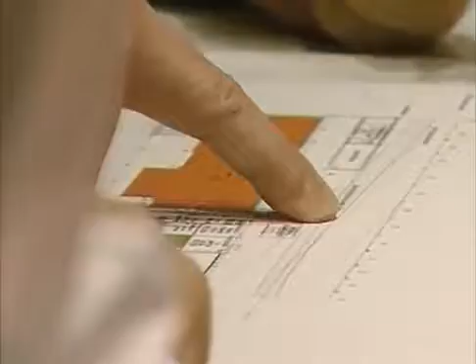Well, we had a very open brief. The club hadn't really attempted anything like this before, so they weren't dictating any particular method of working or role or brief for us. We formed a steering group with about 7 or 8 of the key people, consultants and clients involved with the job from pretty much the outset in March, April of 2000. We managed that group, and that really was the springboard for how the project started.

A major issue for the board of directors was to gain acceptance from the fans for a move from a much-loved home. This would be greatly helped by keeping Arsenal in North London.

Not an easy task, finding enough land to host the footprint of a massive new stadium and the associated increase in traffic to and fro. Amazingly, the Arsenal directors managed to find a site only a few hundred yards from Highbury, but it was far from deserted.

We very quickly realised that the project was broken into 3 fundamental parts: a new stadium, a relocation site at Lough Road where we would have to provide a lot of the facilities that were on the Ashburton Grove site, and then the final phase was Highbury Square.

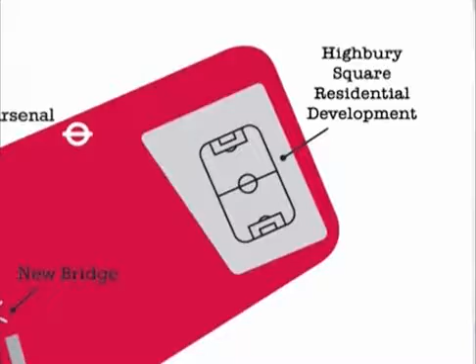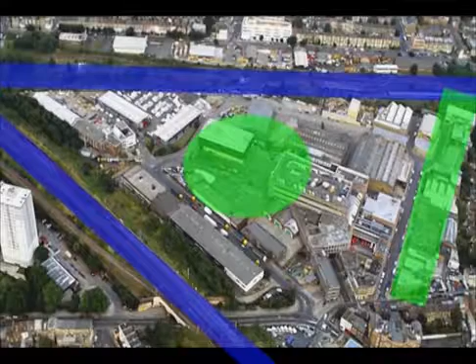Ashburton Grove is roughly a triangle. To the west and the east are mainline railway lines, and to the south a small industrial estate. In the centre lay a council-owned recycling unit, and this would need to be resited at cost to the club, as would the acquiring of the industrial units.

The rest of the project included the very substantial relocations of the North London Waste Authority's waste transfer station, the council's depot, their building maintenance department, and then there were a myriad of other occupiers on the site who all had to be relocated and their site purchased, or just a straight site purchase. That actually became the major focus of the first 3 years of the project.

The entirety of the site included land beyond the boundaries of the railway lines and beyond the Southern Road. Whilst this extra land could all be used, the stadium footprint would have to be within those boundaries.

A key decision was taken to appoint a builder during the design process, not always the case in such projects, and a decision which in retrospect was fundamental to the outstanding success of the project.

Well, we had a very interesting shortlisting. We started with about 6 companies who we thought might be capable of building the new stadium. Really at interview, 2 or 3 of those companies didn't really fit the bill. And then McAlpine were the most memorable, really.

At interview, Rolf Christensen very much came across as somebody who wasn't in any way or shape concerned about the magnitude of the project, wasn't overwhelmed by the project, and was very confident, and even relished the deadline nature of building stadiums and having them open for the beginning of football seasons.

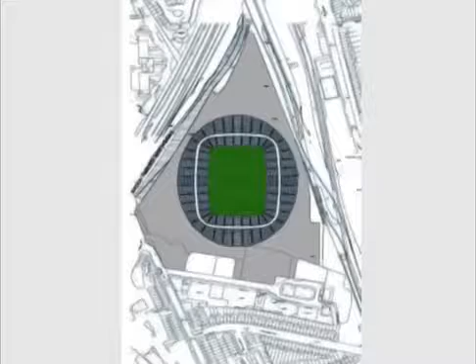An obvious but crucial design decision was choosing the distinctive shape of the stadium. A more conventional rectangular design was discounted, as it was too wasteful of much needed land, and in the end it came down to simple geometry, in that the elliptical shape fitted snugly into the triangular nature of the site, squeezing every inch from the available space.

And we were all new to it, so we all sat down and discussed every part of it, what was required, and they had traveled around stadiums all over Europe, perhaps the world, and they had an idea what they wanted.

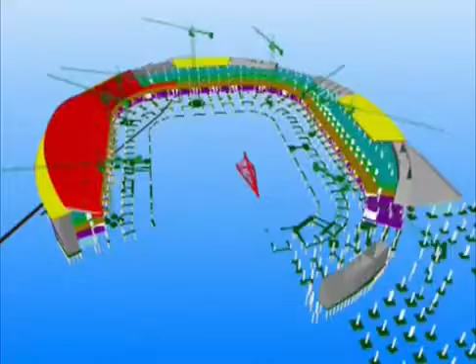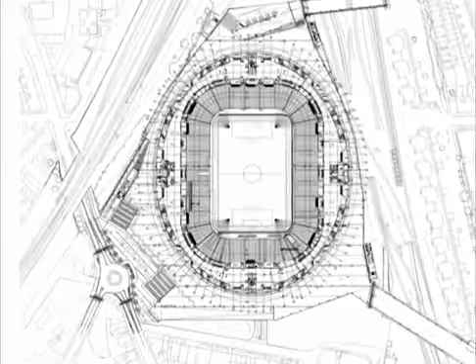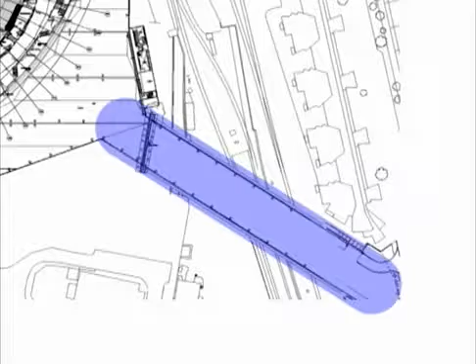To gain planning consent, the club needed to demonstrate that 60,000 fans could come and go with as little negative impact to the local community as possible, preferably using public transport. Two massive bridges were designed on the east of the site spanning the railway line, taking fans to both underground and above-ground stations. Another obstacle was the recycling unit at the site's very centre.

This would have to remain in operation through the early part of the build, while a new unit in Lough Road was constructed. Positives to the community were needed, and it was determined that the stadium would generate much more than simply a new football ground. Areas within the site would contain affordable housing and give companies on the industrial estate a chance of resettling into new premises.

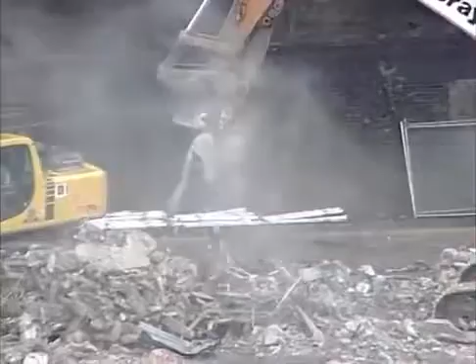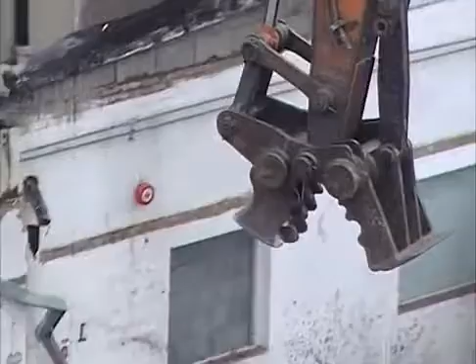What was known at this stage as simply Ashburton Grove would be a much needed and major regeneration of the area. With designs finalised and consents gained, some 2,500 signed documents later saw demolition teams move into Ashburton Grove in February 2003, and McAlpine's site teams settling into their new offices. Again, having designers, engineers and management on site was an important ingredient in the project's success.

Just as things were starting to happen, it all ground to a halt. It was about the end of March 2003. We'd been through the toughest year on the project, going through all the contract negotiations with McAlpine and the funding with the banks. We finally had virtually every one of our ducks in a row.

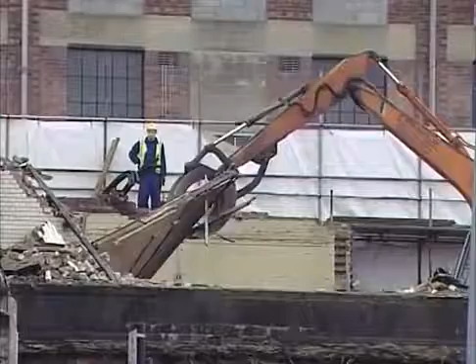Both myself and the client separately went off on holiday at the end of March. When I got back a week or so later, I went in to see him, and he gently dropped the bombshell that one of the banks had pulled out and that the funding wasn't now possible for the stadium.

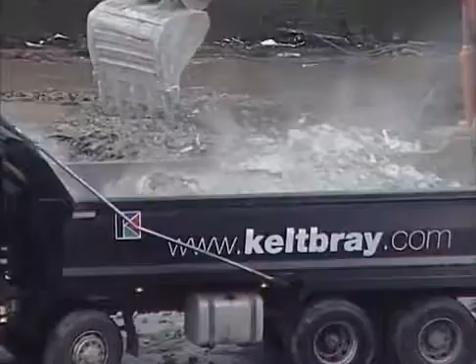Work stopped and the site was mothballed, though Sir Robert McAlpine used this pause in construction to continue design development and progress the Lough Road Waste and Recycling Centre.

Today is an historic day in the life of Arsenal Football Club. I'm delighted to announce that the funding has been secured for our new stadium project.

By the time the funding came in, that was 4 years on the project, and I think everyone had put so much into it that the thought of it not proceeding was awful. So there were some pretty major celebrations at the end of February when the banks finally signed up.

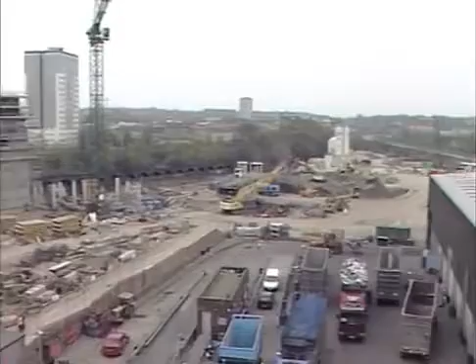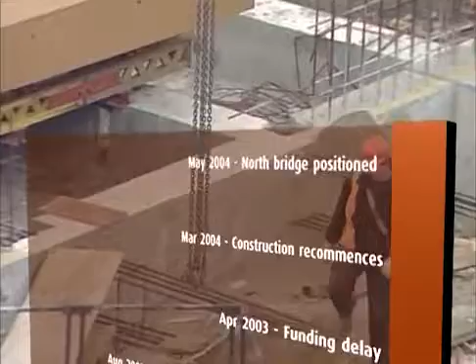With the funding now in place, McAlpines resumed work immediately and with some haste. If milestones along the critical path were not met at this early stage, it might have significant impact later in the project. Railway possessions and such like had been booked well before there was a hiccup in the funding. If the Arsenal board hadn't funded the continued fabrication of the bridge components, and if it wasn't for the speed in which McAlpines resumed construction, there could well have been delays.

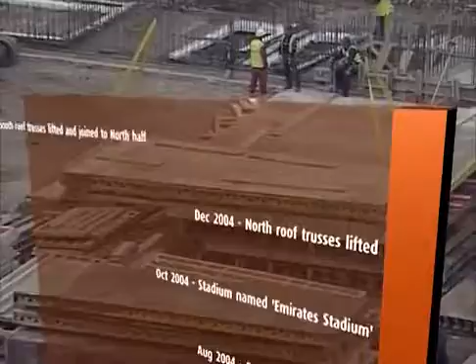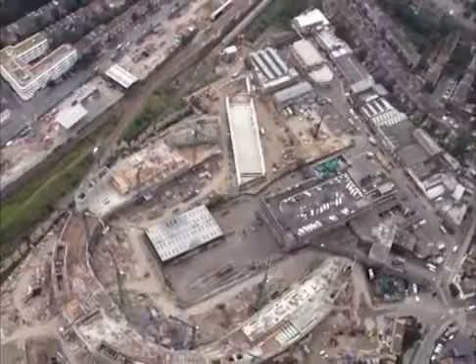Within a matter of weeks, the stadium started to take shape, and the practicalities of construction programming became evident, with one end apparently racing ahead. Of course, this was far from the case. Crucially, the bridge's construction had to be on time. Their assembly site actually fell into the path of the stadium, so they needed to be built and moved into place so as not to delay construction to the south end.

Because of the constrained nature of the site, the construction programme was to commence with the northern parts of the stadium first, leaving space for the bridge construction and the continued use of the recycling unit, afterwards programming the construction of the lower terracing in the south stand to create enough space for the roof truss assembly. Any delay to either the bridges or the roof would delay the fundamental stadium structure.

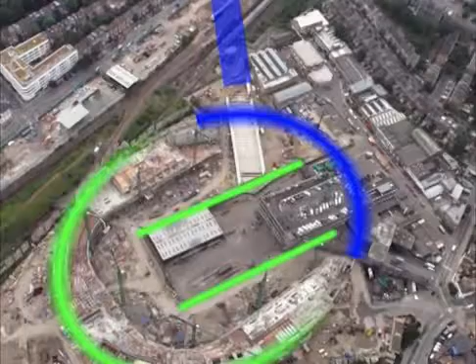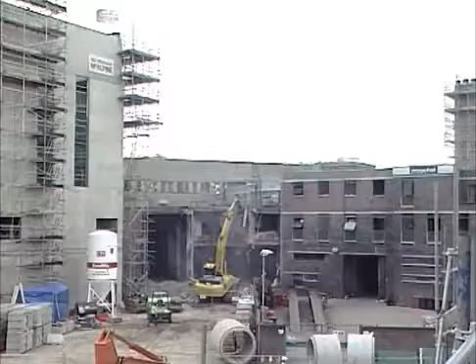We were knocking the buildings down as they were being vacated, or in the first instance having the services isolated. Building vacated, demolish, remediation, and then piling, subsequently following on as closely as we could behind the piling with the substructure. So you have a fine balance all the time in terms of trying to do one operation as close as you can to the next without losing efficiency in either operation.

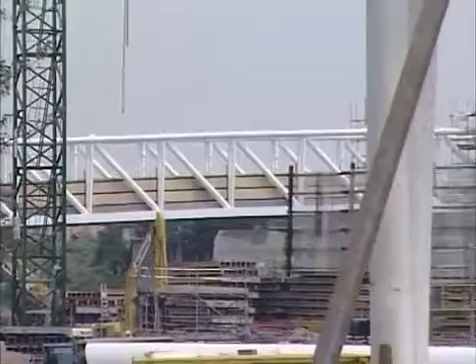Because of the unusual nature of the site, roughly a triangle surrounded by railway lines on two sides, one of the key aspects of the design were for two bridges to be constructed on the northeast and southeast of the site. To get the crowd away, we built two bridges across the railway line, and they are massive bridges. One is 26 meters wide and the other is 18 meters wide. It is two massive bridges just to take the crowd and spread the crowd.

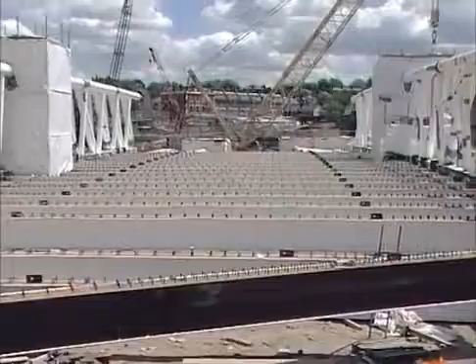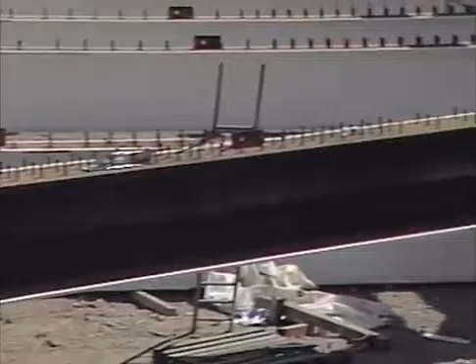There had been a few disasters with football stadiums and crowds, and all this was taken into consideration in the design, so people can escape all over the place. Because the stadium structure would fill a huge percentage of the total site available, elements of these bridges would need to be built and completed before the stadium structure was in place.

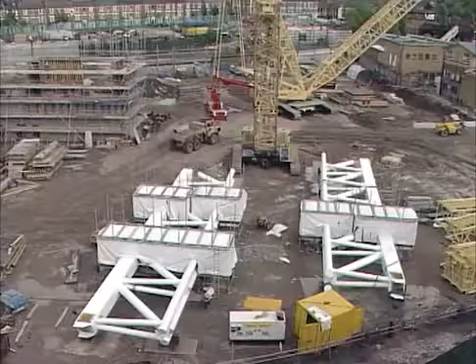The other intricacy with the site was the extent of the works we had to build on the site which weren't necessarily related to the arena. The two bridges are good examples of this - they were assembled in the plan of the stadium and thereby occupied space that we needed to free up to build the stands.

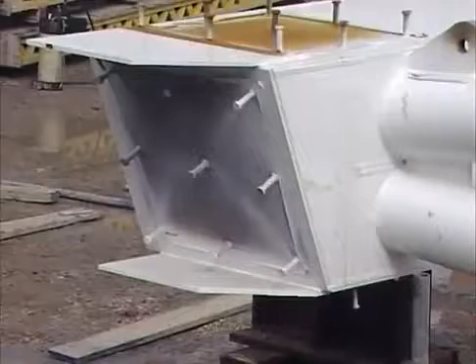The South Bridge in particular sat in the middle of the southwest of the stadium and was built as a whole 100-metre section bridge and then slid across. Until that bridge was located over the railway line and slid into place, that section of the stadium couldn't be built. The same went for the North Bridge up in the northeast corner, whereby elements were built on the site of the stadium and needed to be positioned, with a dependency on getting rail track possessions to install the bridge.

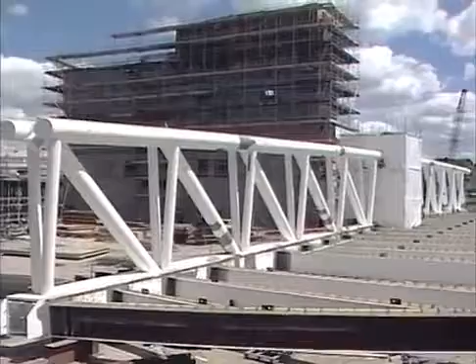So there were quite high levels of risk in terms of third-party approvals, and the consequence of not getting the bridge in place was that we had a critical path delay in the stadium.

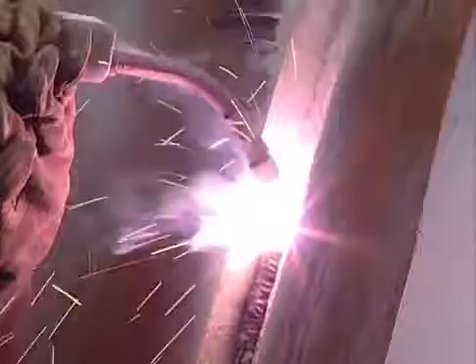The North Bridge was the first to be completed and was built on site from pre-produced sections. The construction team always knew that their positioning on time would be critical to the completion date, and when the funding hiccup in 2003 took place, the good relationship between constructor and client proved crucial.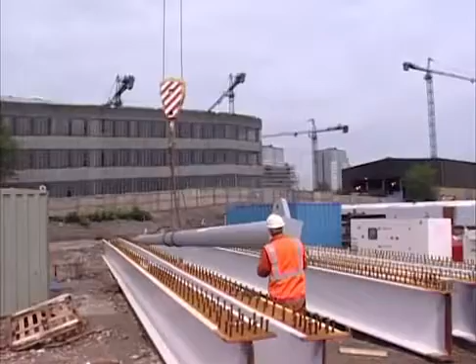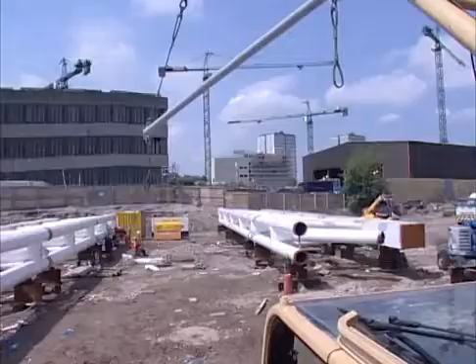We booked that possession 38 weeks prior with Railtrack, so that weekend it had to be ready. To give an example of how committed Arsenal were - that was on the critical path, and then construction was stopped in April 2003 because they didn't get the funding, and obviously it was a long lead-in for material.

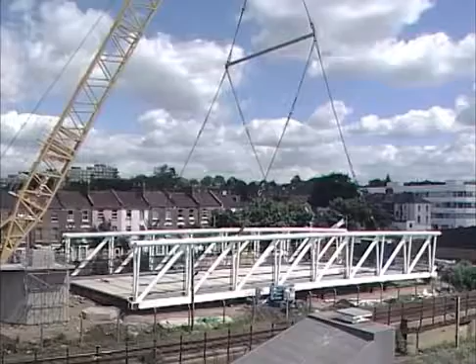Arsenal, with their own money, funded the procurement, all the material, the steel, and also the fabrication. So when they got the funding on the 1st of April, we were ready to go, and we managed to get it across in about 15 or 16 hours in the middle of August. That was critical because we couldn't construct the east stand without it. It was an achievement, and everybody pulled together, and it worked out great.

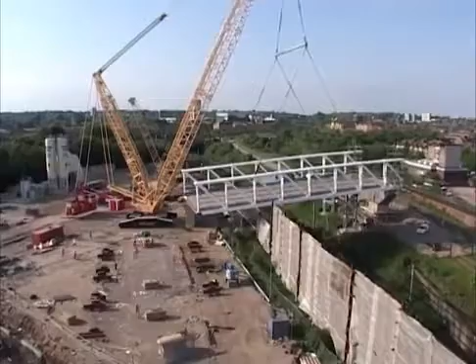With roads and railway lines closed, the North Bridge was ready to be lifted. Built in two halves of 180 tonnes each, the sections were eased into place by massive 750-tonne cranes over two weekend possessions. The second, the South Bridge, was a different animal.

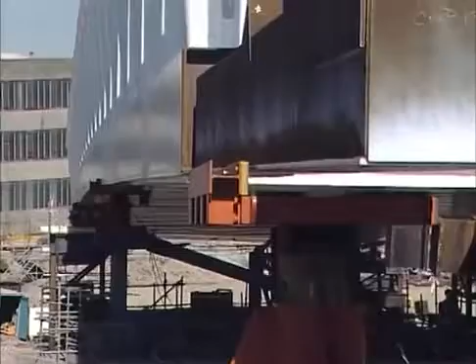It is 100 meters long and weighed 1,000 tonnes, and we basically couldn't get a big enough crane to lift it across. So we had to build it inside the stadium, inside the east stand, and then we were sliding it across.

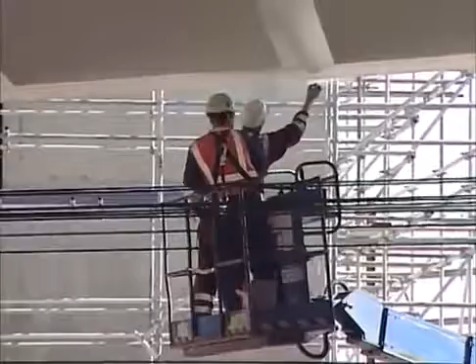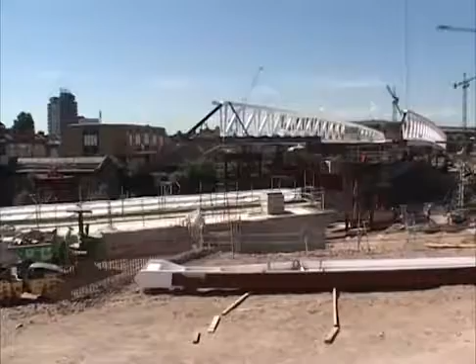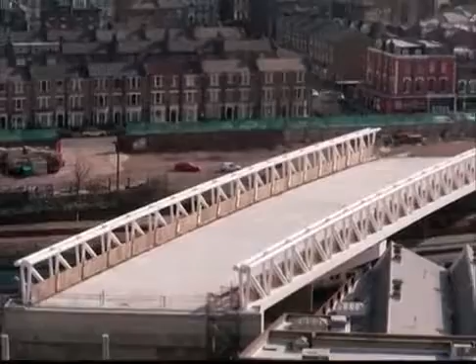A Dutch specialist contractor oversaw this amazing technical operation. A heavily greased 1,000-ton bridge was gently but steadily dragged across Drayton Park Station with amazing precision. The bridge's completion and its moving away from the actual stadium structure allowed the southeastern section of the stadium to be commenced, and a major milestone on the critical path was completed on time.

With the bridges in place and away from the stadium area, attention turned to the closing of the recycling unit. Away from the glare of publicity that Ashburton Grove was creating, across town in Lough Road, the landscape had changed, and the new recycling unit was completed and opened. Built in isolation, this would have been considered a major project in any local community, and was a tangible sign to the local population of the benefits the new stadium would bring.

Now that demolition of the waste unit could commence, work could begin on the two southernmost cores, and the area that would become a world-class football pitch could be cleared and levelled.

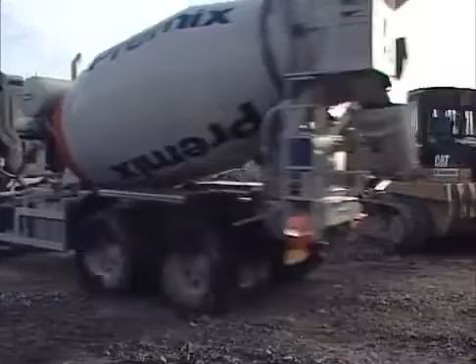On the 22nd of October 2004, the Arsenal directors made another important announcement. Construction of our new stadium has progressed at a fantastic rate, thanks to the great work by our stadium constructors, Sir Robert McAlpine. With the opening of our stadium in summer 2006 quickly approaching, we're delighted today to be announcing a significant partnership which will lead us into this new chapter in the history of Arsenal. This relationship is for both a naming rights partner for the new stadium and also a club sponsorship agreement, representing the biggest ever financial sponsorship deal in English football. So it is my honour to announce the beginning of the partnership between Arsenal Football Club and Emirates. Ashburton Grove was now to be known as the Emirates Stadium. A major sponsorship deal had been signed, and any financial worries for the board started to seem a lifetime away.

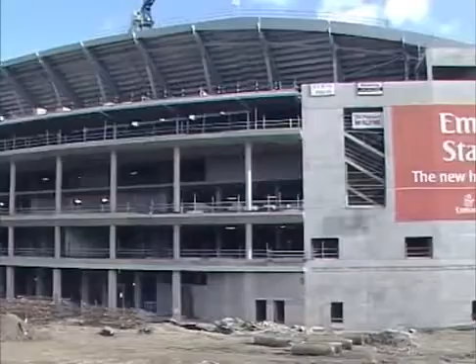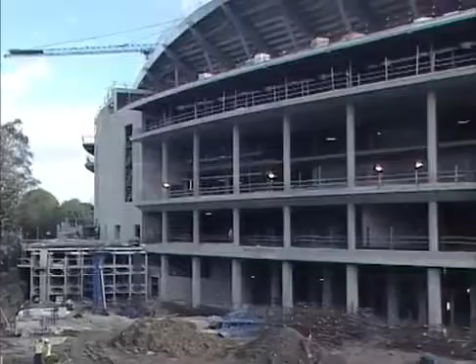The other aspect of the stadium is that on the 7 hectare footprint, the stadium covered the whole area - there was no spare land left at all. And then you consider there's 600 or 700 or 800 car parking spaces below, which is helping everybody. It's quite unusual that within a stadium you have the parking facilities. The stadium has a raised podium, so everything at ground level is either car parking, changing rooms, kitchen, storeroom and maintenance room. But all that had to be squeezed into the footprint on this triangle we had at the stadium.

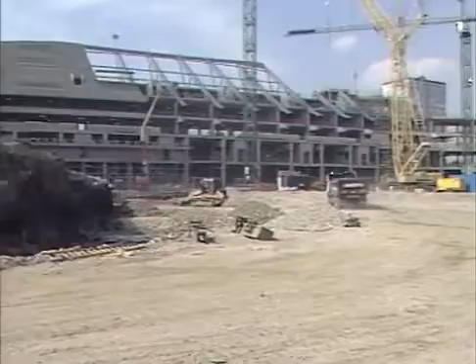The northern end of the stadium raced on ahead of the southern end, until both bridges and recycling units had moved. Then the southern cores could be built, but leaving out the southern prefabricated terracing units to allow space for the roof trusses to be swung into position. Only once the roof trusses were in position could the full stadium continue on to completion.

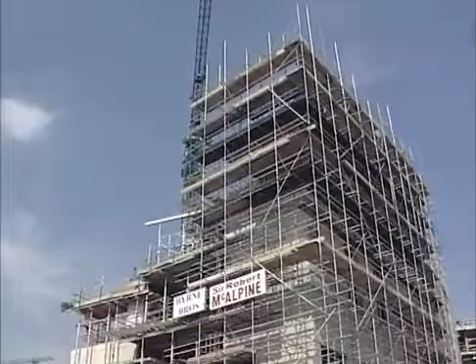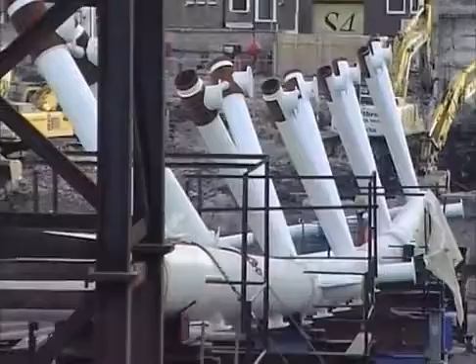The roof trusses had to be built in the same way as the bridges. Prefabricated components were shipped onto site, joined together in the future pitch area, and then hoisted into position and bolted together. The roof was a real challenge.

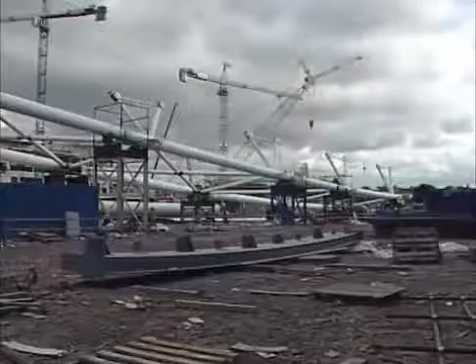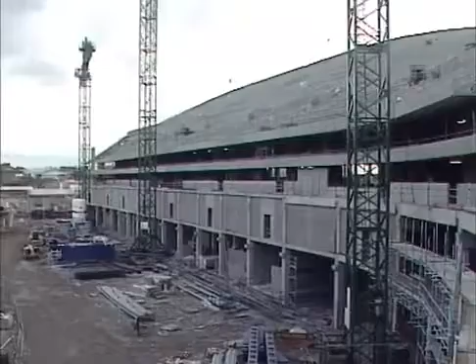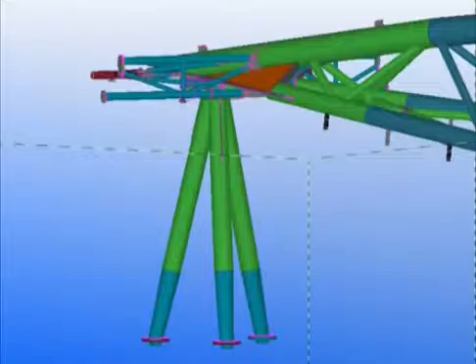Historically, stadiums have had problems with the roof. We obviously spent a lot of time together with Watson - their engineering is very, very good, they are tubular specialists, and we had used them previously. We spent a lot of time with them and the structural engineer, Buro Happold, going through how we were going to fabricate it and how we were going to erect it. We simplified it - it was originally decided we were going to lift it in one, this 220 metre long steel truss, 800 tons, but then we decided to lift it in two and prop it. With this X model design they used, every piece of steel went up and fitted - it didn't have to be taken down or remade. This X model in the design was definitely a huge help for us, and it worked out well.

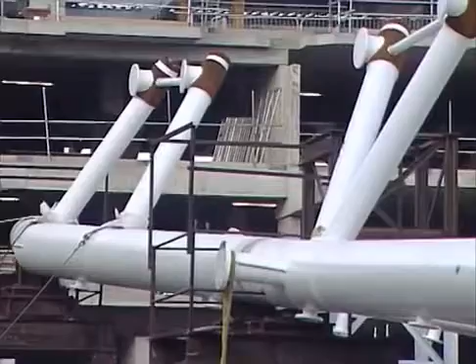We were able to erect the roof steelwork in 6 months, and that included all the secondary steel. We fitted the secondary steelwork at site level, so it went up already fitted, and that reduced the program and also reduced the health and safety risk for people working up in the air. It was all bolted together - there was no welding up at the top - and it went well.

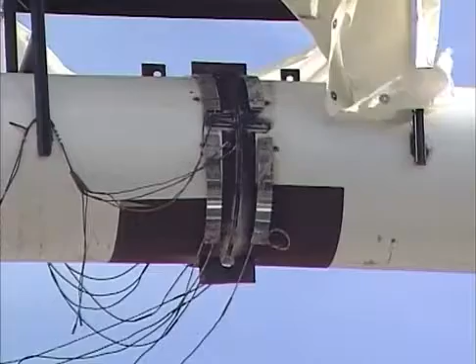The obvious example would be the roof, in terms of identifying how we were going to erect the primary and secondary trusses, since the trusses were longer than the space available to sit them down in the middle of the pitch. To try and assemble a complete truss on the ground inside the stadium would mean elements of that steel truss were sticking into the reinforced concrete structure, thereby fragmenting the ellipse. So a very early objective we set was to enable us to build a continuous ellipse, albeit with the lower tier front, lower tier left down. But by having a complete ellipse, it then allowed us to set commissioning zones and installation zones for the services and the fit out.

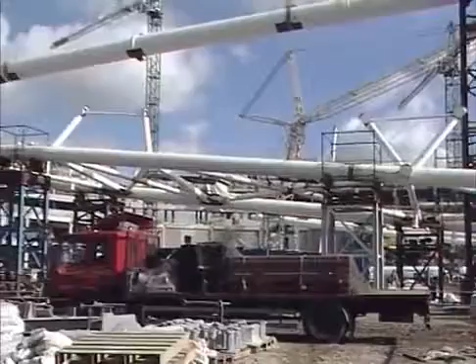Even with the programmed completion of the lower southern terracing, there simply wasn't enough space within the stadium pitch area to build the entire roof structure in one go.

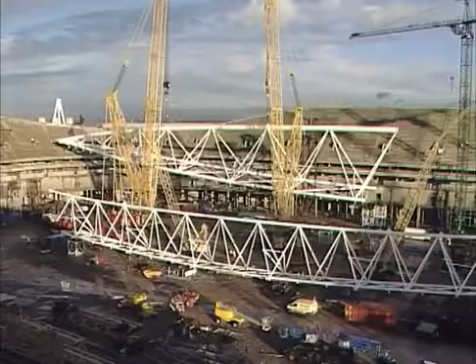The northern end was built first and lifted in December 2004. Then the southern end was built and lifted the following April. The cranes were back, and the sections were lifted onto four gigantic tripods in each corner of the stadium, supported at the midpoint on temporary trestles.

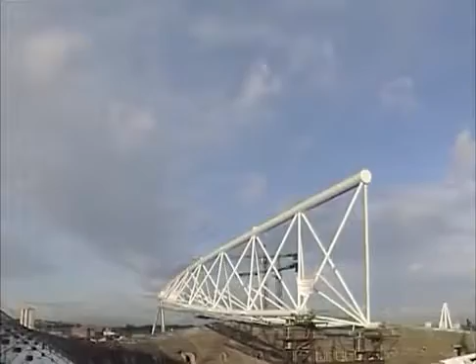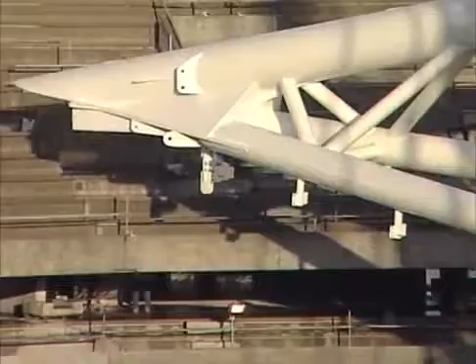The installation of the roof trusses freed up commencement of the lower terraces, particularly in the west stand, where all the players' change areas, referee change, and so on were located. There were quite a lot of rooms beneath those lower terraces with all the associated services, plumbing, showering, and so on. It was critical to get out of the way to complete the frame.

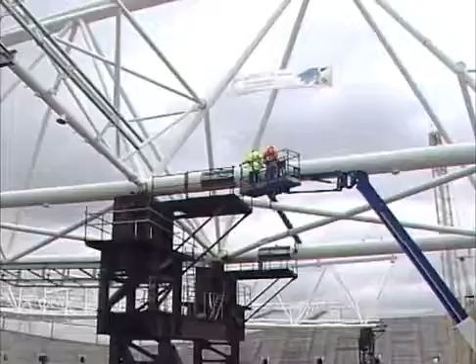Finally, when all was in place, Arsenal director Danny Fiszman was lifted into position to place the ceremonial bolt joining the two roof halves together. With the roof trusses now in place, the future pitch was clear and the race for completion was on.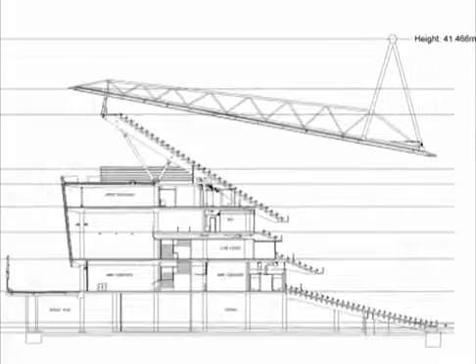The inward sloping nature of the roof presented a number of challenges in terms of removing water from the internal perimeter and allowing sufficient sunlight onto the pitch, to prevent the problems other stadiums had of reduced sunlight affecting their playing surfaces.

The roof is all in one piece and moves around with temperature and wind, and moves quite a lot. The glazing that fits between the roof and the top of the concrete stands is glass in steel frames, and has to articulate quite significantly to accommodate that movement. So it not only leans, but it leans inwards and outwards and sideways both ways.

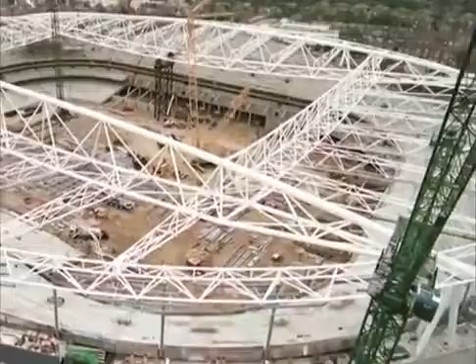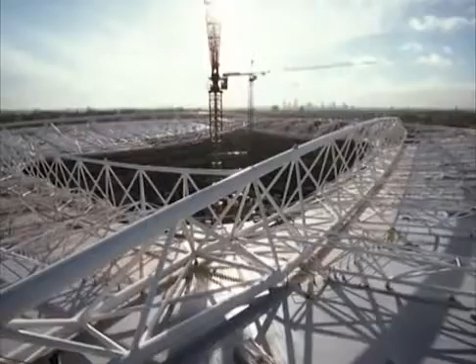Getting that to go up looking right, with enough movement capability to accommodate the movement that's going to hit when winter comes or summer comes—and we had some hot temperatures in the summer and some cold temperatures in the winter—was interesting.

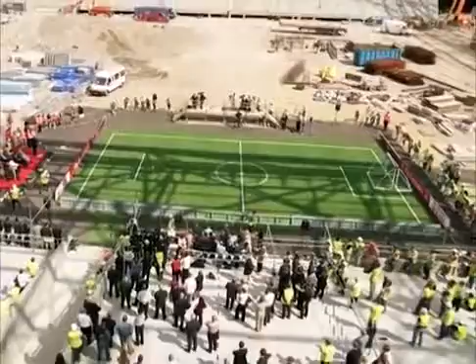The stadium structure was now complete, and another key milestone, the attainment of full height, was celebrated with a traditional topping out ceremony on the 15th of August 2005.

A team of Arsenal directors played a team of Sir Robert McAlpine management and other project partners in the first game of football to be played at the Emirates Stadium. The major structure was now complete, and the job of fitting out this enormous stadium was to begin.

We've got 10 chillers with a capacity of about 5 megawatts of cooling capacity. We've got over 50 air handling units. We've got about 40 catering establishments, whether it be kitchens—one large kitchen, a central processing unit, with about 16 kitchens and 20-odd catering establishments. So it's quite a large distribution system.

When the stadium was designed, and with the initial funding concerns, the interior was designed as a basic fit. Piping in toilets would be exposed and blockwork would be more visible. As more investors came on board, and with the Emirates sponsorship sealed, an upgrade in the fittings and fixtures was now possible. Then came a new challenge with the catering.

The catering contractor pulled out. It was a problem—they didn't have anyone to fit out the kitchen and the concessions. They came in and said, what can you do? And together, we fitted out the kitchen and the concessions.

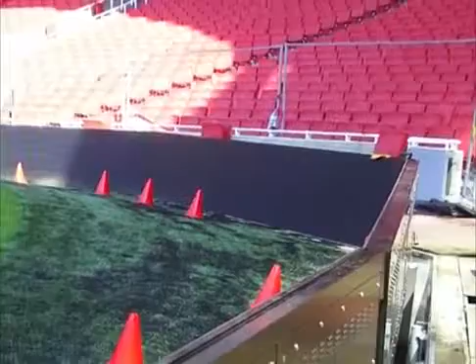As far as the advertising boards were concerned, they introduced electronic boards as a fairly late change, which required trenches around the edge of the pitch and significant servicing. So even the pitch was subject to change and development. Again, it showed the level of achievement in hitting dates - we never fell behind programme, so there was opportunity to carry out additional works and improve the design. The pitch at this moment, after they've played 20 odd games, is in fantastic condition according to the Arsenal board.

The top two sides in the Premiership went directly to the group stage of the Champions League, and Arsenal were lagging behind the top two. This would require them to play a qualifying match in early August, and the contracted date for completion was August the 1st. With ramp-up events needed prior to granting a safety certificate, the club had to ask McAlpines to try and finish early. It was vital that it was finished.

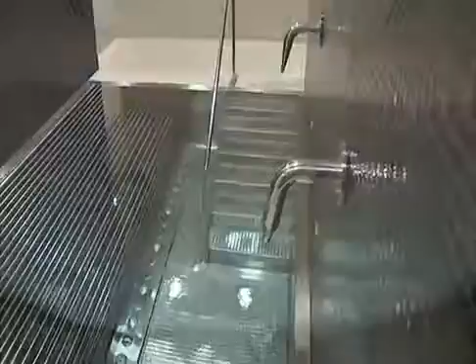By working together in the last 2 months, they installed the IT and telephone lines, all the furniture was being installed, the kitchen was being commissioned. We did our commissioning, snagging and de-snagging, and where we'd expected 400 or 500 people on site for the last month, it was actually 1,500 people on site.

On top of that, training was going on with all the stewards - Arsenal has about 1,000 stewards, and that was happening at the same time. The catering people also trained 300 or 400 people, all in the last few weeks. So the last 6 to 8 weeks were a little bit hectic, but everybody kept calm and worked together. I think if we hadn't had a good team spirit and trust between ourselves, it could have been a 2 or 3 month delay.

We allowed them, prior to practical completion, to go in and do their training and commissioning. The reason for that was we were all in the same boat with one objective - to complete it on time or earlier.

In the climate of delays to the new Wembley project, the Emirates team set a completion date in July and a first match for the 22nd of July - Dennis Bergkamp's testimonial, Arsenal versus Ajax. Just 7 to 10 days after we got practical completion, they had 50,000 people in the stadium and played the testimonial for Bergkamp, and everything worked satisfactorily - getting spectators in and out, the IT, and so on.

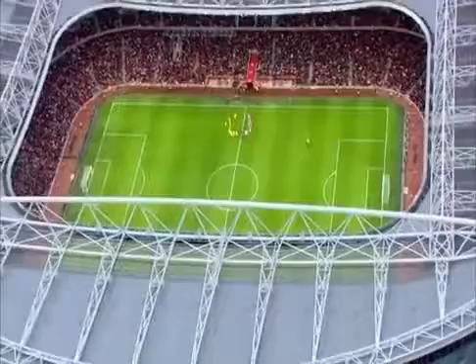Seeing what 60,000 people look like is quite something to plan for, realizing there's between 600 and 1,000 trains on the tube. When you actually see them on the first day with 60,000 people in the stadium, you suddenly realize it's a whole new ball game. But for me, to see 54,000 people in and have it work - that was the acid test, and I think that's what I would never forget.

I think it was a model project in terms of being a fast project which we completed on time. We obviously completed it within budget, both of which are huge ticks in the box for any potential client, and they're not easy things to deliver.

My primary memory is coming over the South Bridge with my wife and two sons to the Bergkamp testimonial. That's the thing that will stick with me as a lasting memory, because it's probably the first time it really dawned on me, seeing everybody coming into the stadium, just what it was. So that'd be my abiding memory.

The people whose project it is are HOK, who designed it, and Arsenal, who had the vision for it. What I did was help to make it work. In my eyes it's a model project, and for McAlpine too - we managed to build something the team, except HOK Sport, had not done before, and we did it. Again, it's a lesson there: if you apply simple engineering knowledge, you can do a lot.